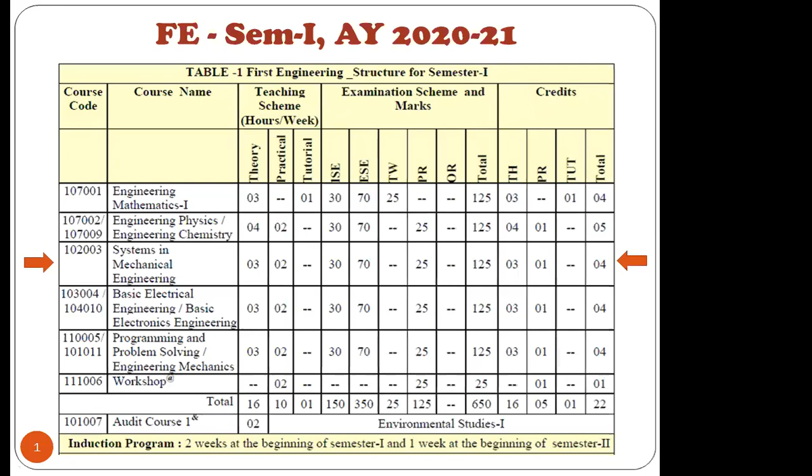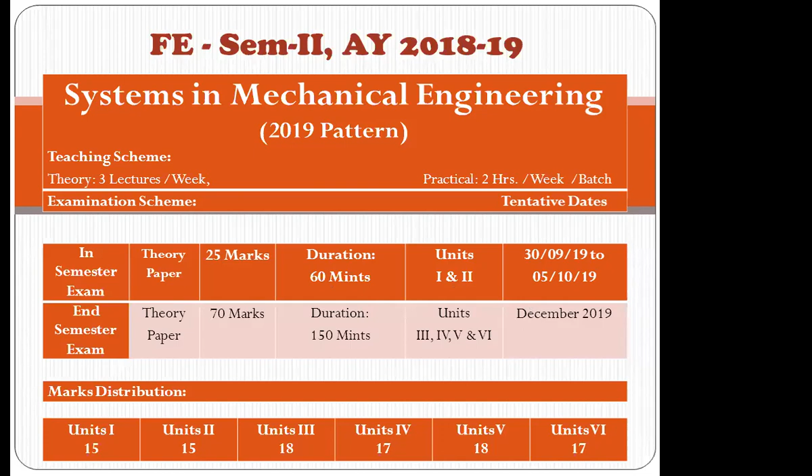I hope all of you have joined the Google Classroom, as I have requested, for the Systems in Mechanical Engineering subject. So we had discussed this part. I hope nobody is having any doubt in this, in the examination as well as in the marks distribution in the teaching scheme. Course objectives and course outcomes we had already discussed.

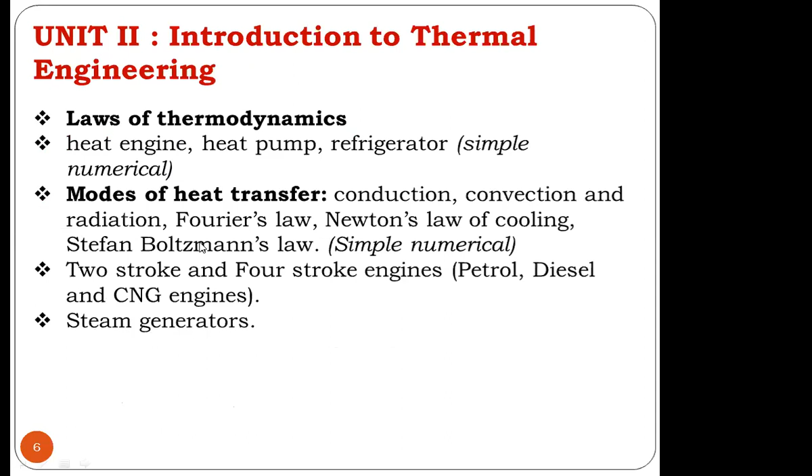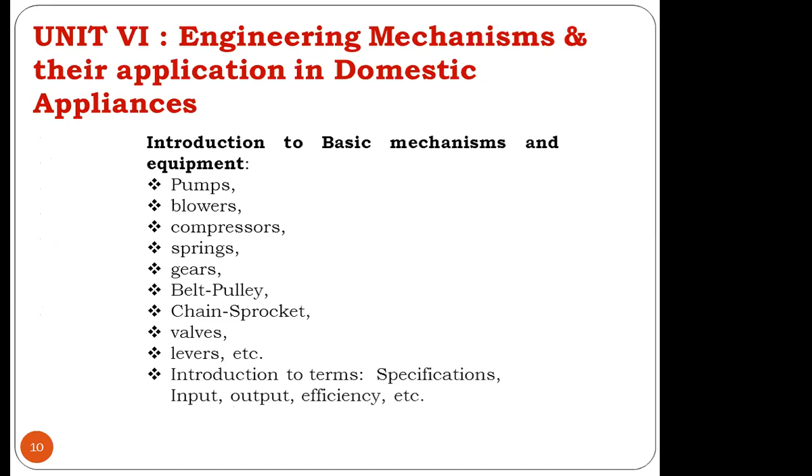Then the syllabus we had discussed. Unit 1 syllabus we had already discussed, part A and part B. Then unit 2, we had discussed 3, 4, 5 and 6. All the units' syllabus we have discussed earlier. That is not a problem. Now today, from today onwards, we are going to start our exact topic.

Don't scribe, Himanshu.

So from today onwards, we are going to discuss the content of the syllabus, isn't it? That is nothing but the first unit. So Himanshu, don't scribe. Are you there, Himanshu?

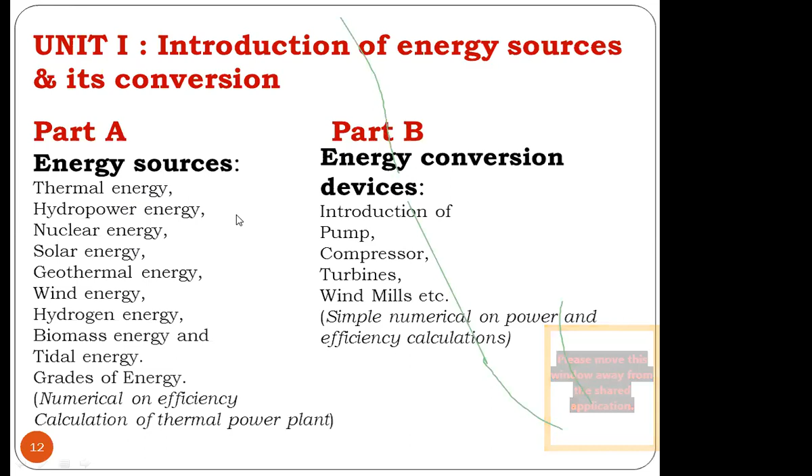So today we are about to start from part A, that is the energy sources. Now if we discuss the different sources of energy, the very first thing that comes to mind is we have two major sources of energy: one is the non-conventional energy sources and another one is the conventional energy resources. All of you have studied this many times till 12th standard, but still we will revise this.

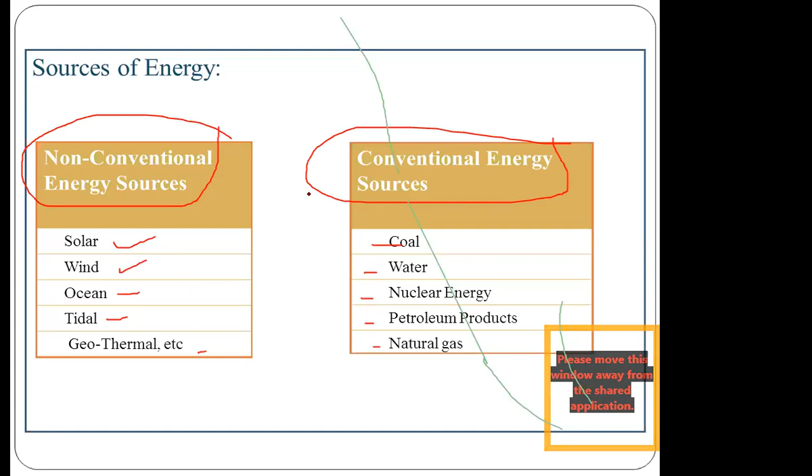So the well-known non-conventional energy resources are solar, wind, ocean, tidal, and geothermal energy resources. And the conventional energy sources are coal, water, nuclear energy, petroleum products, and natural gases. These are the different sources of energy. Then we will discuss the different advantages and disadvantages of both energy sources.

So when we first discuss non-conventional energy sources, their advantages are: these are easily available in nature, so we can use them quite nicely. Their availability is in large quantity. The very best advantage is these are non-polluting. They don't pollute. They also have very less maintenance cost.

But on the contrary, the disadvantage of non-conventional energy sources is their availability. They are available in very low intensity, and only in a particular period of time. Then the efficiency of these particular energy sources is very less. And if we try to utilize this source of energy, we need some equipment or arrangement, and that particular arrangement or equipment is quite costly.

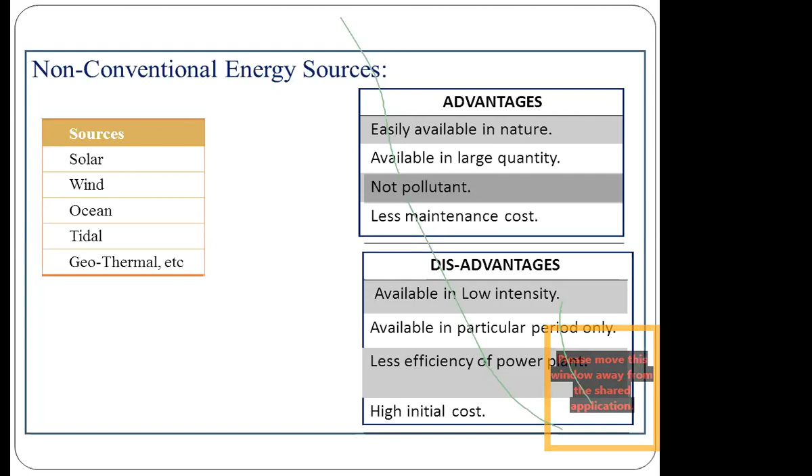Discussing conventional and non-conventional energy sources, the advantages are that thermal efficiency is quite more, which is what we are mainly interested in. Comparing the initial cost with the non-conventional one, it is quite cheaper, and intensities are quite high as compared with the non-conventional one.

But the main disadvantage of this particular energy source is that its running and maintenance cost is quite high. Whenever we have any system running on this energy source, its operating cost and maintenance cost are both quite high. Another biggest disadvantage is that these energy resources or the plant makes pollution, so these are polluting.

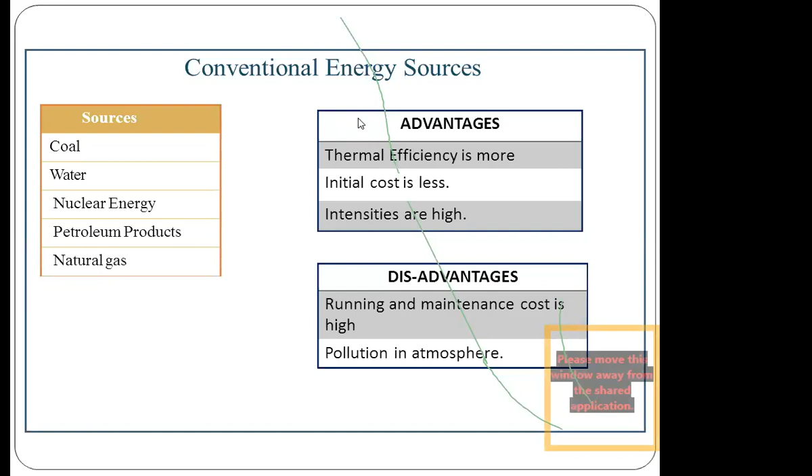Okay, so next is just a minute.

Am I audible? Yes sir, yes sir.

Sagar, don't scribble. You don't have to touch the screen if you are attending this lecture with your mobile. Don't scribble. If you touch the screen anywhere, it causes scribbling here and it will disturb you and me both. So don't scribble, don't make disturbances. Okay, sorry sir, okay.

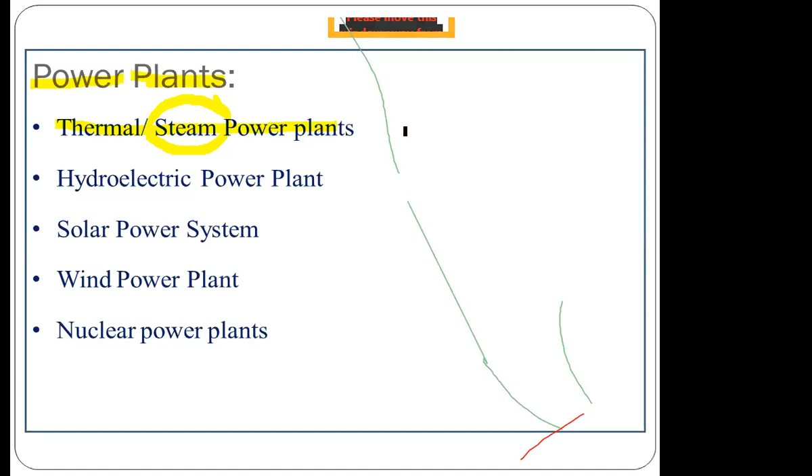Very good. Then in Nashik also we do have one more thermal power plant, Eklahare thermal power plant. So if you are from the mechanical stream, you may have to visit that particular power plant in the field trip, in your industrial visit you may be visiting that particular power plant. Then different hydroelectric power plants are there.

Can anybody tell me the name of the hydroelectric power plants which are there in the Maharashtra area?

Not a problem. Then the next ones are the solar power plant, wind power plant, and nuclear power plant. So all these are the power plants which we are going to discuss in this particular unit.

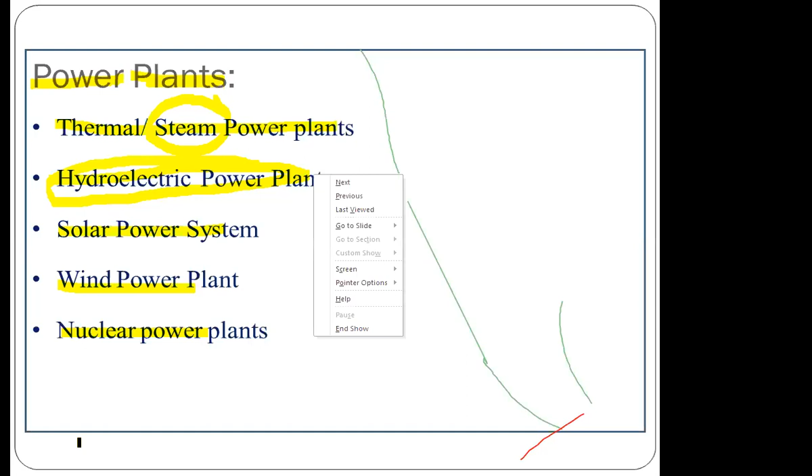Now, what does a thermal power plant basically do? Thermal power plant is the largest source of power generation in India, and about 75% of the electricity consumed by India is generated only by thermal power plants.

There are different types of thermal power plants based on the fuel used to generate the steam, such as coal, gas, diesel, isn't it? So there are different sorts of power plants according to the fuel used.

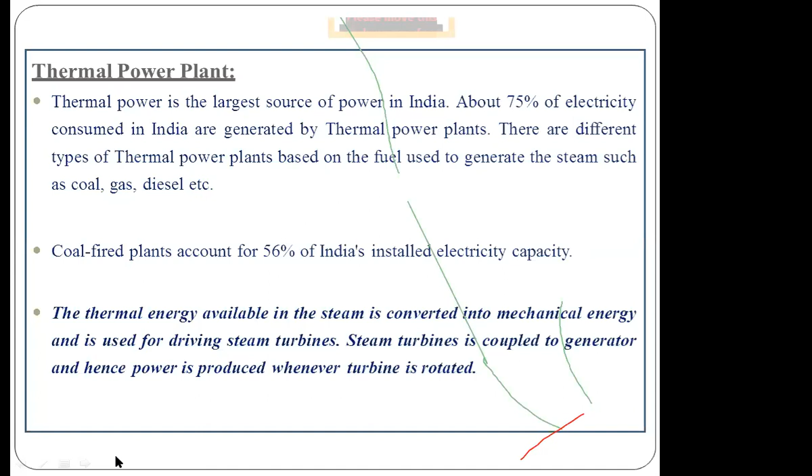Before discussing this particular thermal power plant, we will go through one video. Usually my procedure is that it is better to understand any concept through a mechanism or a moving thing or a video. That is better, we can grasp those things very easily. So what I have done is arranged one video which will explain us the basic working of the thermal power plant. That is what we are going to do.

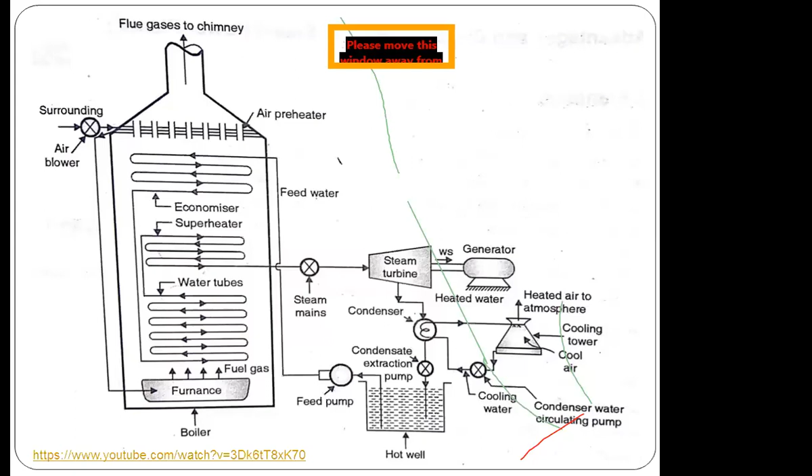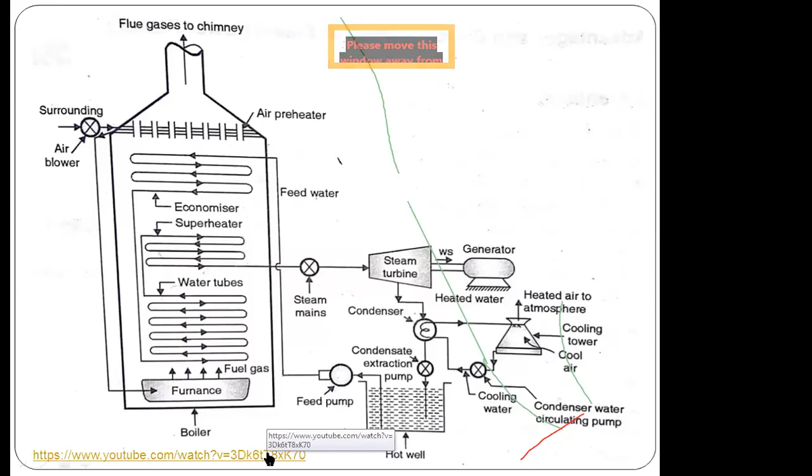So now what we will do is discuss the working of this particular power plant, but prior to that we are going to see the video.

Can you see this particular video? No sir. You can't see, na? Wait. Now can you see this video? Yes sir, just a minute. Okay thank you.

This is the working video of a thermal power plant. I hope you can see now. This is how thermal power plant works.

Now see from where we are going to start, so this is our starting point. It might all look very confusing right now, but if we start from the first point, you will understand each and every point very clearly. Now this is the boiler.

What is the role of the boiler? It is there to convert water into steam. So here, what we are feeding to this boiler is hot water, and it is converting this hot water into steam. What happens in the boiler is the conversion of water into steam. So what we are feeding over there is, through the furnace, we are giving heat to the boiler. And for providing that heat, what we are supplying here is coal.

So this particular boiler, or this thermal power plant, works on the fuel that is coal. We have one coal storage unit, and from that coal storage unit, the coal is brought to the furnace through a coal handling system. There are different sorts of devices or processes which we do on the coal, we do many processes and then bring it to the furnace, and then it is going to be burned.